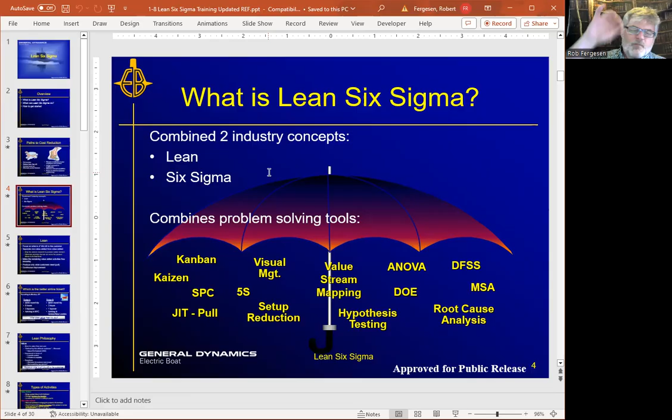And JIT is also useful. And we'll talk about how that might be used, it's just-in-time pull-based, might be used in a manufacturing line, like a robot system as well. Other ones are more sort of business improvement-y things. We're not going to use those, but they're useful to learn about.

The focus with lean is value to the customer. We've already talked about that. We're going to map the actions required to produce that value stream, and we're going to eliminate activities that don't produce value.

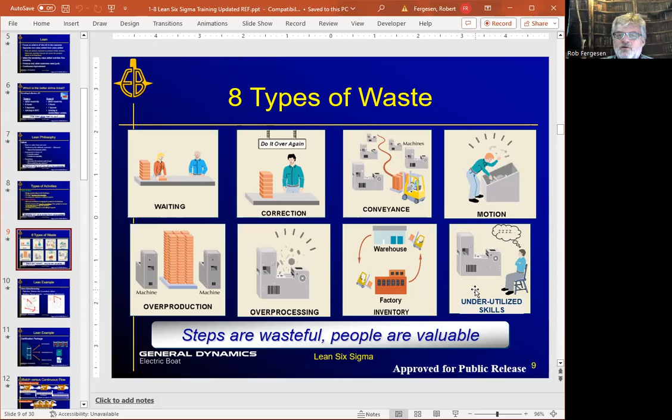Here are the 8 types of waste we saw earlier. Actually, I don't think it's exactly the same number, but they give you some great icons here to understand what those types of waste are: waiting, correction, conveyance, motion, overproduction, overprocessing, extra inventory, and underutilized skills. I like underutilized skills. It's the best waste.

And here's an example of something they did at Electric Boat, where they had a valve block where they had to basically add legs and feet to this block to get it machined properly and lifted properly. So what they did is they redesigned it with legs and feet built into the basic design of it, so it did not need any kind of temporary attachments. That's an example of lean. They took away all these steps of adding and removing temporary attachments, even if it made a slightly heavier and clunkier looking valve body.

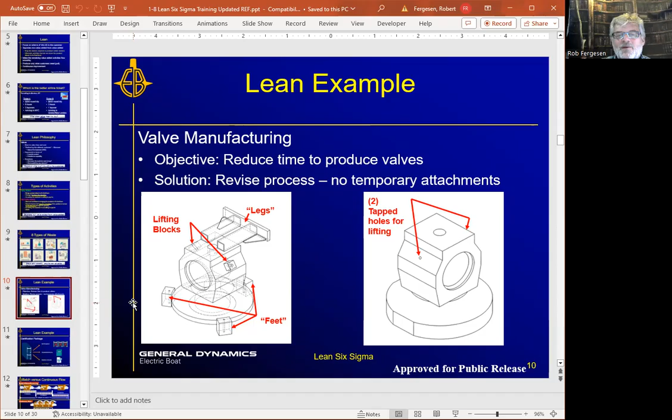Another lean example is the idea that they were producing certification packages at Electric Boat. And these certification packages were things that they knew they had to do. They started in 1941, whenever they started producing these submarines. And the Navy, who was using these submarines, required a certification package for each component. And then somewhere in the 90s, they said, we don't need that. It'll become electronic. And then somewhere in the early thousands, they said, we don't need that. All of that's electronic. You guys are so reliable. We don't need a certification on this, this, and this; all we need is just this.

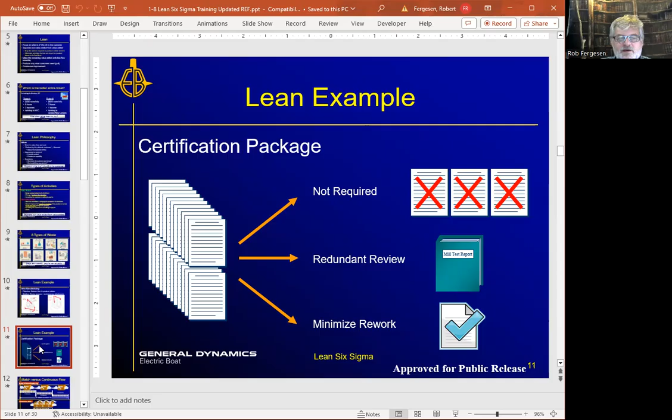So to get to lean, you go back to your customer and say, do you still need this entire package? The answer is no, we don't need that package. A lot of it's not required. We don't need a redundant review. And you can take out the places where you had to recheck things. No more rework. Those are examples of improvements that Electric Boat did.

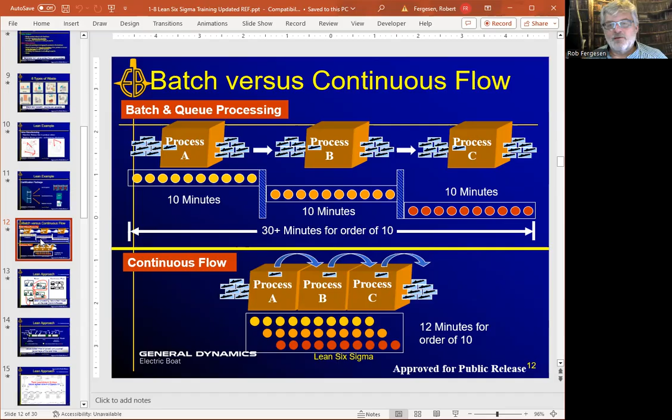Another improvement that's constant for lean manufacturing is, instead of having multiple processes with queued up inventory, and I like the fact that their queued up inventory are little pictures of submarines. I'm kind of laughing at the concept of a little flock of submarines stacked up between work cells. But yeah, it takes, in this example, 30 minutes for an order of 10. And if you put them all in the same work cell, ABC, in 12 minutes you can produce an order of 10. So you can reduce your cycle time with a continuous flow, a lot better process. Also, by moving your work cell together to one place from multiple departments, having multiple different sets of machines or processing, you can create a continuous flow and radically reduce walk time and overall time to produce.

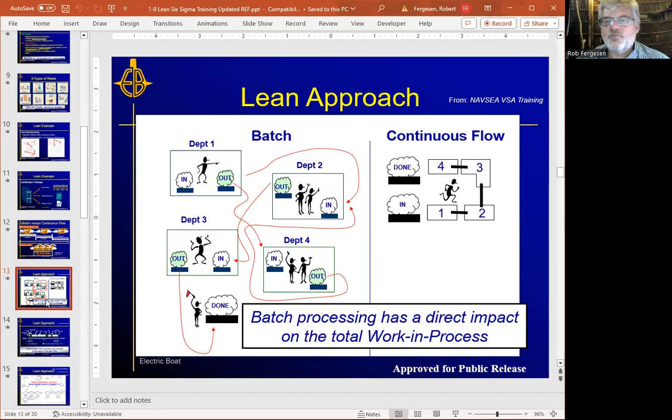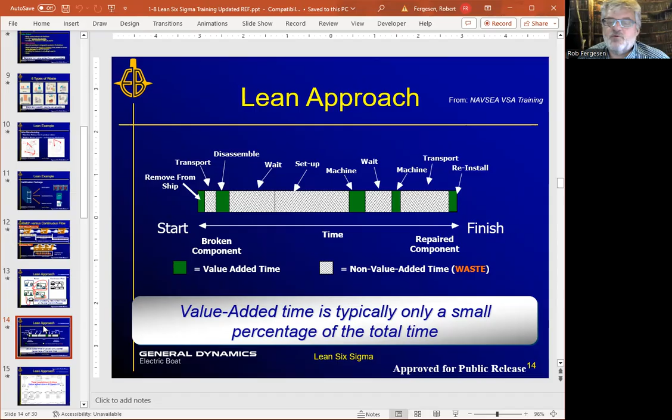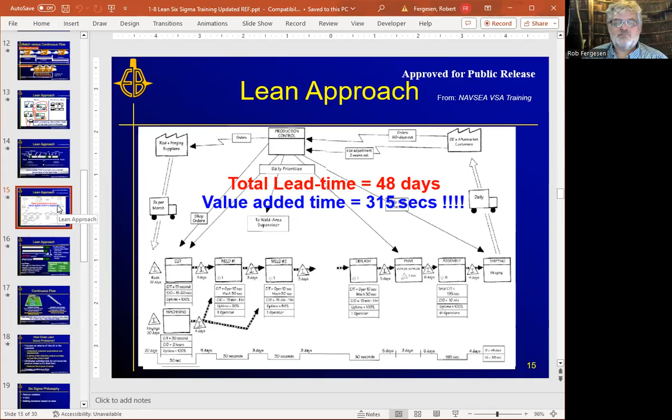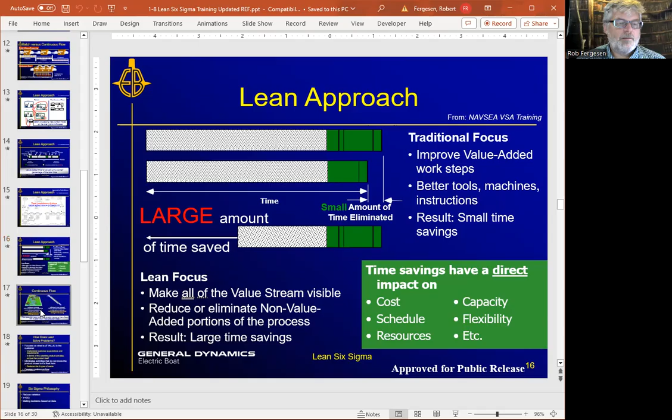So the lean approach is to focus on making all this visible, make all your value streams visible to everybody involved so that everybody can be on board with the improvements that need to happen. They're saying the traditional approach is to buy better tools and machines, and the better way is to focus on improvement by removing non-value added time. And they say continuous flow is better. I'm going to skip over that slide because that's sort of obvious. The main value of lean is focusing on what the customer sees as valuable. Understand their expectations, and going back to your customer on all the different parts that you're producing will create value for your business.

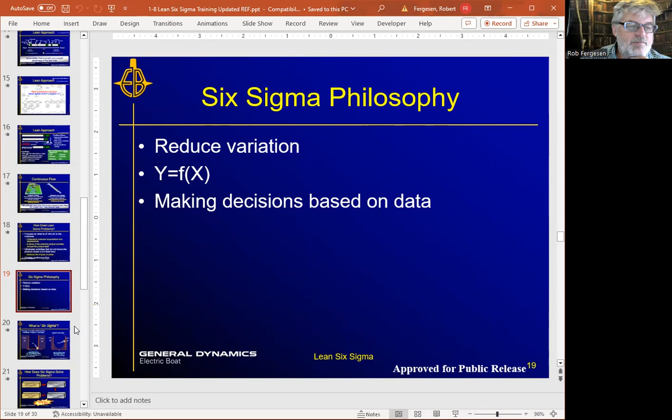So now we're going to get to the Six Sigma part out of General Dynamics. The idea of Six Sigma is you've got a measurement system that measures quality. So Six Sigma basically is a change in how you measure quality. In the old days, you had an upper limit and a lower limit. If your size for the part you just cut was too small, it would fail. If it was too big, it would fail. Anything in that range is okay. But that's not good enough for Six Sigma.

What you want to do is create a model where you're not creating parts that are at the outside edge of that range. You're continually improving that part because that deviation from target causes an increasing number of problems. And so by continually improving your process, you get rid of that small variation, which saves you money. And by continually improving, you define, you measure, you analyze, you improve, and then you control. You're continually making your products better.

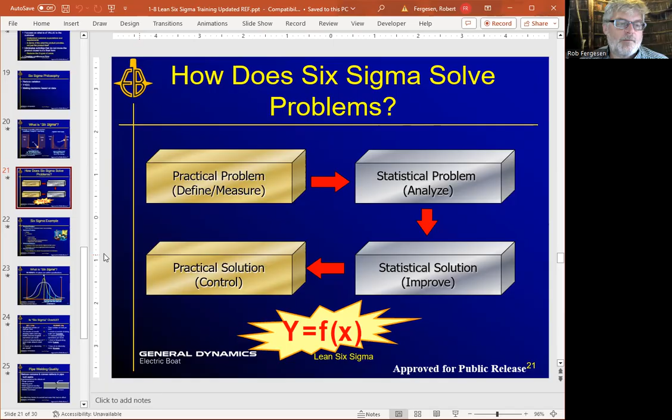Here's an example that they talked about for their technician exams. I'm not sure how appropriate it is for us, but their technician exam pass rate was declining, and they looked at it and said, well, why aren't our technicians passing this exam? So they dove into it. They looked at the formula for creating scores, the place of training, the exam section, how skills were used, and the elapsed time between the training and the exam.

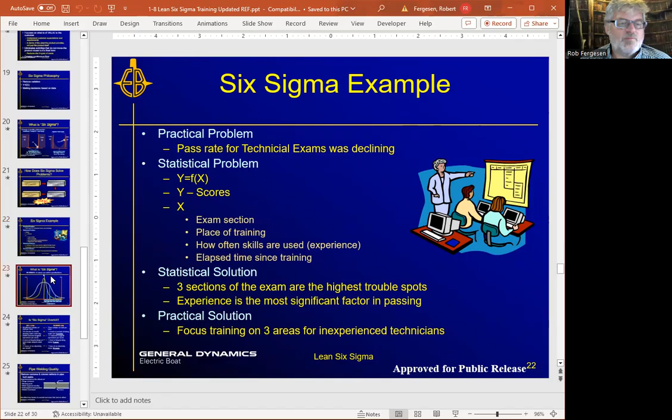And they discovered that 3 sections of the exam were causing the biggest set of problems, and that the ones that passed this exam were the ones with the most experience. So instead of changing the exam, they focused their training on those 3 areas for their inexperienced technicians. They gave them more experience. So that's an example of how you would deal with Six Sigma.

So Six Sigma talks about a percentage based on a normal bell curve for how often some sort of event occurs. A bell curve is just a way of describing a normal distribution of events. Say if you're cutting parts, you'll see that they aren't precisely right on target each time. Some might be a little bit short, some a little bit long, and the longer ones tend to be less common, so they're down on the right side of the bell curve, and the shorter ones are less common too, so they're on the left side of the bell curve.

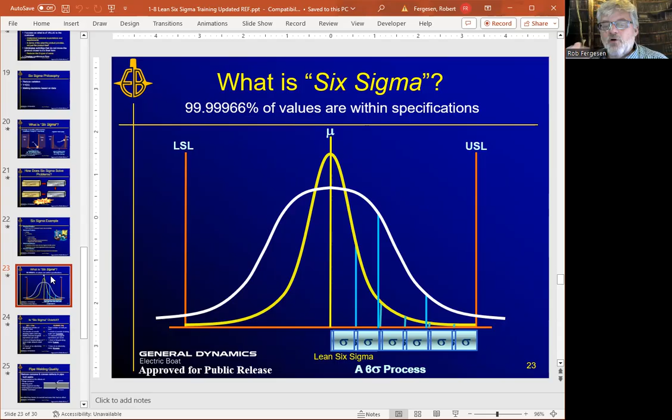The sigma means standard deviation. It is a way of measuring how often that occurrence occurs. If you say Six Sigma, that means that's an event that occurs only at 6 standard deviations out. That means it occurs only 1 minus 99.99966% of the time. So just a tiny, tiny fraction of the time that event could occur. You want to prove that all of your products are staying at that high percent of good.

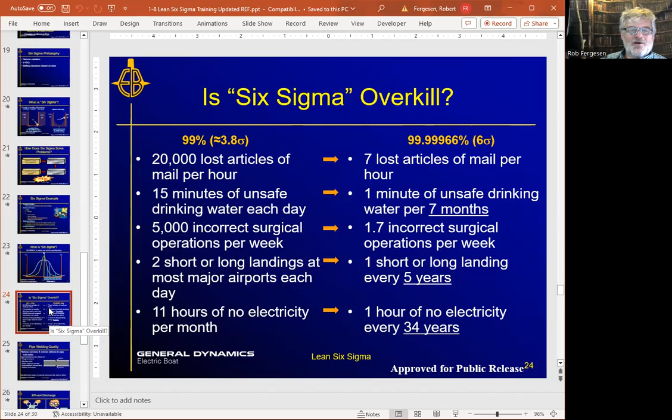And this is the slide that says, is Six Sigma too much? Is that 99.99% good too good? Is that overkill? And they compare 20,000 articles of mail per hour. If we didn't have Six Sigma and we were mailmen, we'd be in trouble. But if we do match Six Sigma, there's only 7 lost articles of mail per hour. Actually, I'm not sure. We probably have more than that. If we had 3.8 Sigma, then we would have 15 minutes of unsafe drinking water every day. So I think they're being a little bit over the top with this presentation.

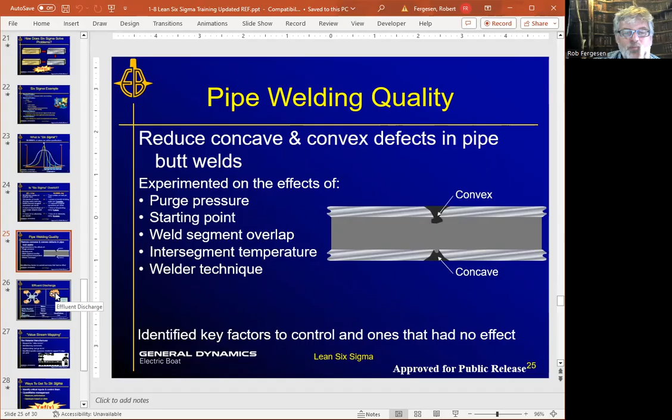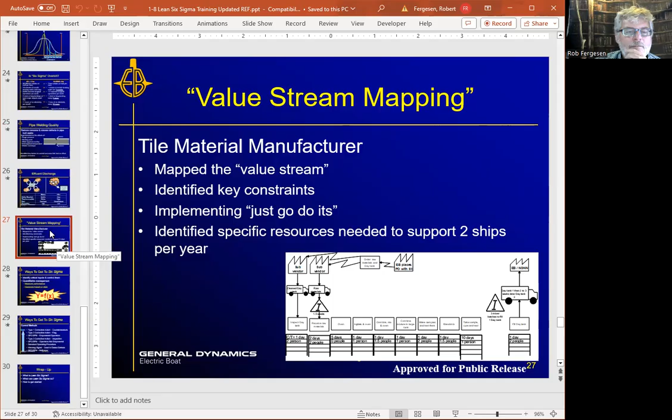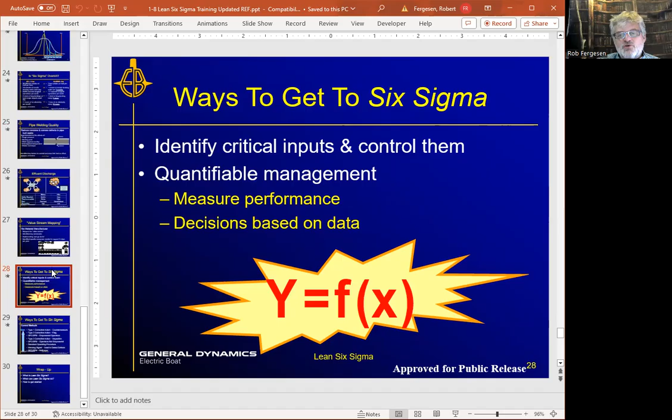And they talk about one of their examples where they started doing some pipe welding, and they did some effluent discharge, and then they did some value stream mapping. And they talked about ways to get to Six Sigma: identify critical inputs and control them, quantifiable management. You have to have a measurement for your performance. That's really, really important. We're going to talk about those methods later. And they talked about their methods to get to Six Sigma, which I'm not sure is important for us.

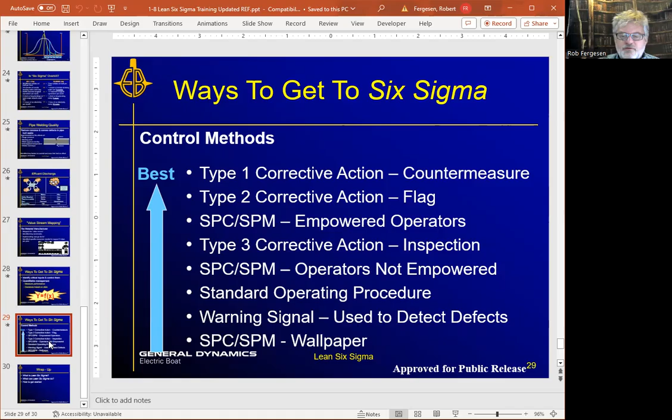All right, the important stuff for us is that Six Sigma is a continuous improvement methodology for statistically how you produce your product. From a robot work cell standpoint, Six Sigma is important in terms of robot movement. If I can get that robot to pick up the part and place that part properly 99.99966% of the time, then we're good. If it's only 99% of the time, that's not good enough. You want that robot to work continuously for days on end. You don't want to have to get back in there and tweak the part.

The example I'm giving you is based on a real world example at Pella. They've got a robot cell there that screws up just often enough that they don't want to run that work cell until someone's fixed the problem. So you don't want to be that guy who makes a work cell that's only 99% good. All right.